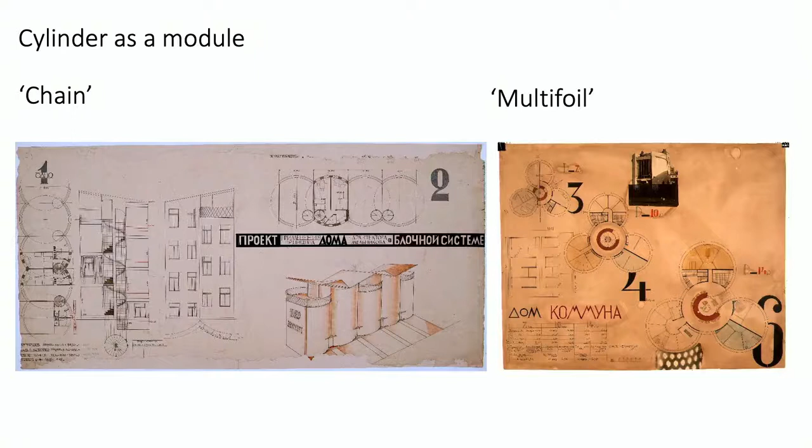Of course, Melnikov didn't invent cylinders, but the idea wasn't about cylinders themselves, rather about their interaction, their interplay. Viewed from above, the two cylinders intersect for about 1/3 of their volume, like two wedding rings. You can use any number of these cylinders as modules. Here are examples of sketch projects by Melnikov, chains made of cylinders, 5 cylinders, multifoil shapes, and he also proposed things like snakes.

It was presented as a prototype, a 1-to-1 model of future social housing. In 1920s Russia there was a housing crisis, many people coming from the countryside to the capital, industrialization, a shortage of housing. This was on the agenda not only in Russia but probably around Europe too — look at the Bauhaus and other countries — the problem of cheap social housing was on the agenda. And it was presented in this way.

But what we learned, first of all from the diaries of Melnikov, which we discovered and deciphered, is that this was just a camouflage, a cover. It was recommended by his connections, his patrons in the Moscow City Council, to present it in a socially and politically acceptable way at that time. In fact, it was Melnikov's dream of a family home.

Now we come to the family story. There was a family of four: Konstantin, Anna, and two kids, a boy and a girl, Mila and Vitya. Here is this nice couple, and this is Konstantin in almost a military uniform — but don't be fooled, this is his architecture uniform from the Imperial School of Architecture, where he was a student before the revolution.

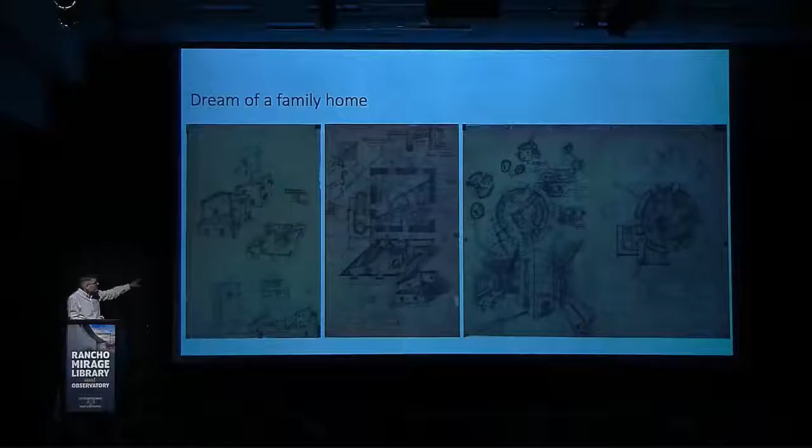So why am I so sure about his dream of a family home? We discovered these early drawings, much earlier than the house of 1927-29, from the early 20s, prototypes of his dream family home. First an almost quadrant, octagonal form, then more egg-shaped, and other quadrant versions, but unusual, with a sort of spiral, as you can see here.

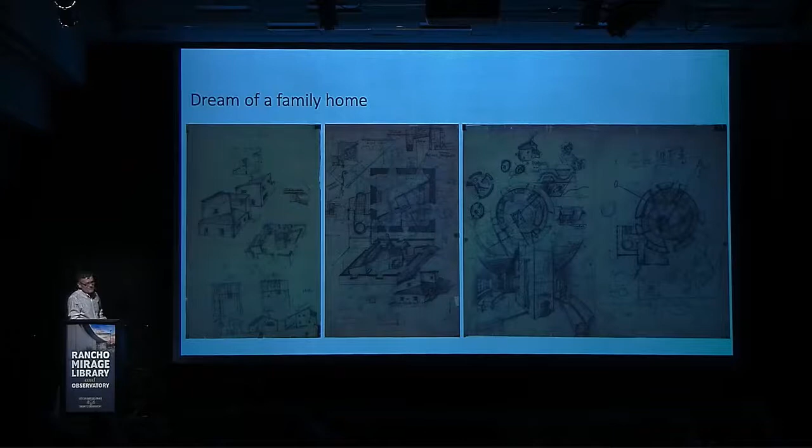But both these versions have an important deficiency. You can see in the center of the ground floor plan, here and here, the heater, important in the Russian climate. If it is right in the center of the ground floor, you become dependent on it. Life around the heater is not really a free plan. We will see how he overcame this situation in his plan for the house later.

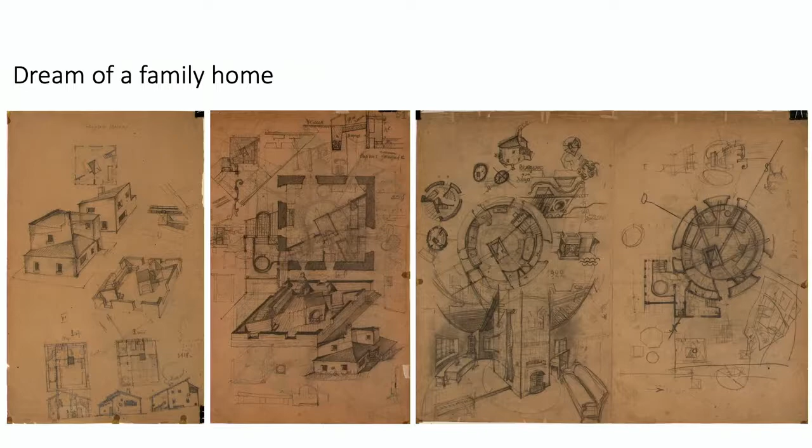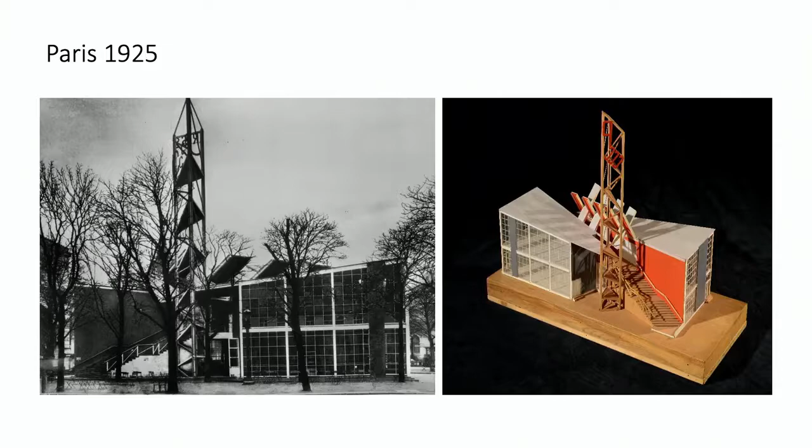I should touch briefly on two stories from a couple of years before the story of the house on Krivoarbatsky. The first is Melnikov's involvement in designing the Paris pavilion.

The Soviet exhibition pavilion for the Universal Exposition in Paris was a very low budget structure, almost a kiosk made of wood and glass, built in a really short period of time. Melnikov learned here how to deal with simple materials and how to achieve a lot in terms of architecture and space using very simple, low budget building materials. This pavilion was actually one of the sensations of the exposition.

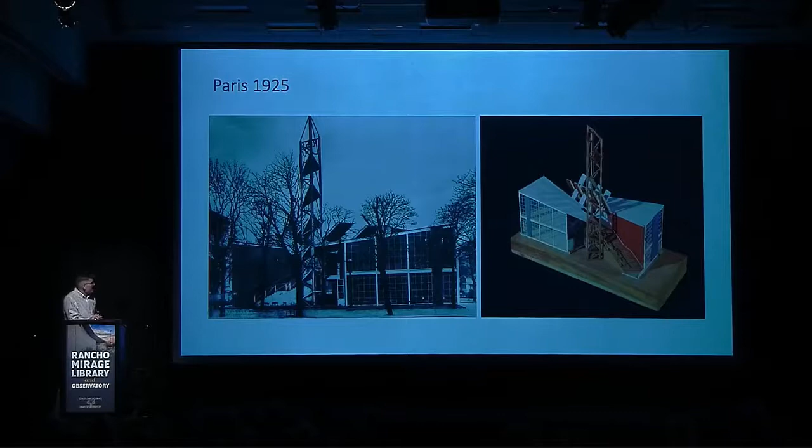Melnikov spent almost a year there. Here he is in this top hat, which is still in the house. It was too bourgeois to wear in the Soviet Union, so it's in perfect shape until now. You can see him in the circle, supervising the assembling of the pavilion by a team of French carpenters. It was an important year for him.

He became famous, as I said, and made good connections with other architects - with Corbusier, with Auguste Perret, with Robert Mallet-Stevens. But we think the idea of this house came to his mind in Paris, the idea of a house as more than just a family home - a house as a manifest, a house as a statement, a message to the city, if you'd like.

Because if you're an architect starting with a capital letter A, you have to build something like this.

Another project, less known but maybe more politically important for Melnikov's survival, was his involvement in the super secret project to keep Lenin's body forever in Moscow. We still have this strange ziggurat on Red Square, keeping the body under a glass cover, under a vitrine. It was not Melnikov who designed the building itself, but he was responsible for the sarcophagus, for the glass cover.

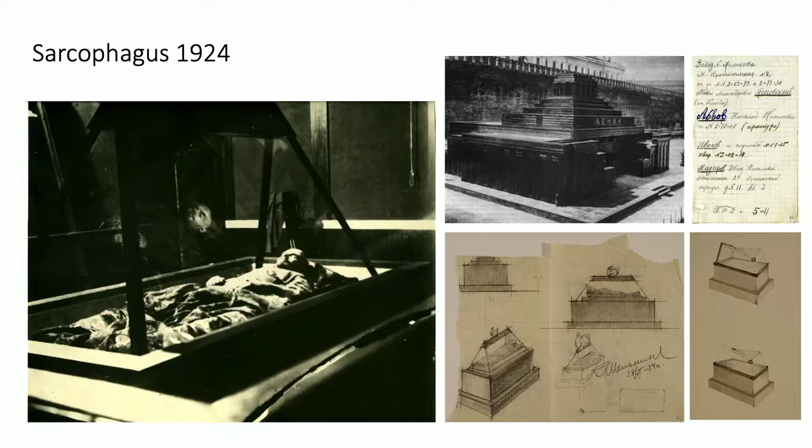It was five months' work under the close eye of special security services. It was a commission without the right to make a mistake. And he did it brilliantly.

We think, as one of our hypotheses, that the land - a small piece of land, but right in downtown Moscow, about one-fifth of an acre - was given to him as a sort of compensation for his services, for his two important jobs for the Soviet government. So he had good patrons, good protection at the top of the Bolshevik elite.

These people, they all disappeared 10, 20 years later during the Stalin purges. They were intellectuals, very naive people, idealists trying to build a utopia. But these people helped Melnikov get the land for this experiment.

So the whole story of the family home was presented as an experiment on his family - an ongoing experiment, years and years, decades and decades. So de facto, it was not private at that time. It was given for the experiment.

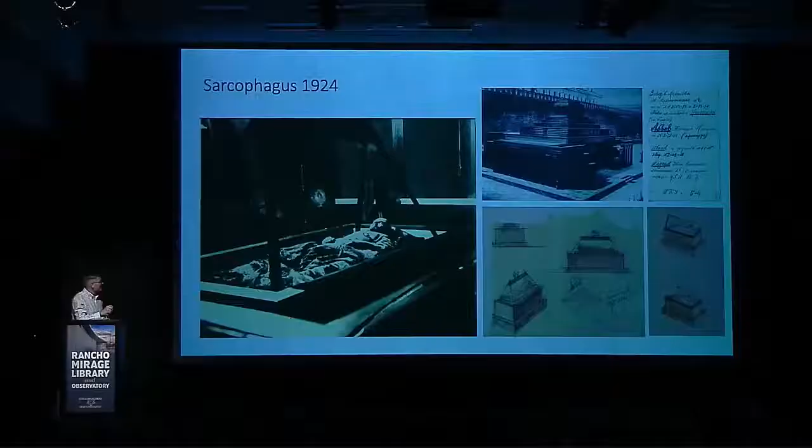But for Wright, it was definitely for business reasons, because there was a presentation room, he accepted clients there, etc. For Melnikov, his main client was the Soviet state and Soviet trade unions under control of the state, so there was no need to promote business in this way. It's definitely not a business reason. In his life, Melnikov was a very modest person. He was never arrogant, so it's not a sign of arrogance or supremacy. No way, even though it can be understood in different ways.

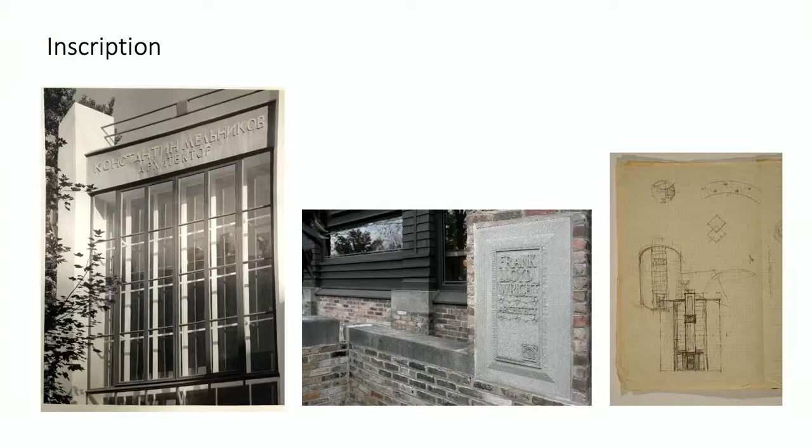Let's read again: it's not the name of Lenin or Stalin, it's the name of Melnikov. So he didn't understand the reality around him. 10 years later, he was out of the profession - basically it was forbidden for him to work as an architect, and he became like an exile in this house.

So it was a dream. He reached his dream. There were a lot of difficulties - we will talk about him later - but he reached it. He paid for this. He paid with money, but also he paid with his career and with his life.

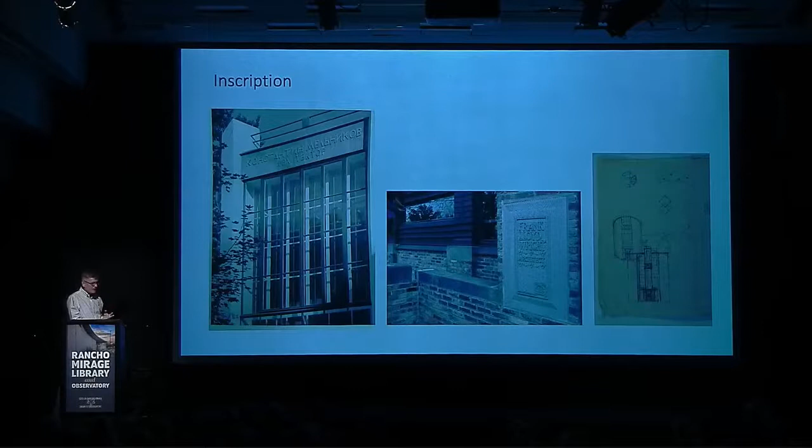So he was never sent to Gulag or to prison, no - it was a place of his exile. Nobody took over this house. But then there were like 3 decades, from '38 till the mid-60s, of surviving. At the age of 48, from being one of the top 10 Soviet architects, he became zero, nothing.

And it was really a difficult time, years and decades. And again, this house became like a curse for him.

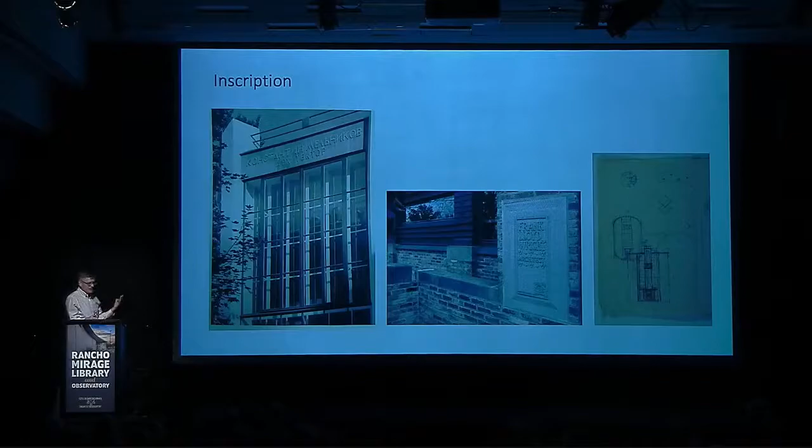You may think about this house as two cylinders, as a pure form, but I'll give you a few examples of other Melnikov projects, and you may see that he was a real master of form. Form for him was the essence of architecture, not function - form first, unlike, for example, his colleagues and opponents, the constructivists of the same period in Russia. So he worked with very interesting and unusual forms for that time, like a triangle for an office building, or a cigar shape, or a triangle and fan shape, this flower type - a flower tower - and this anthropomorphic plan for a workers' club.

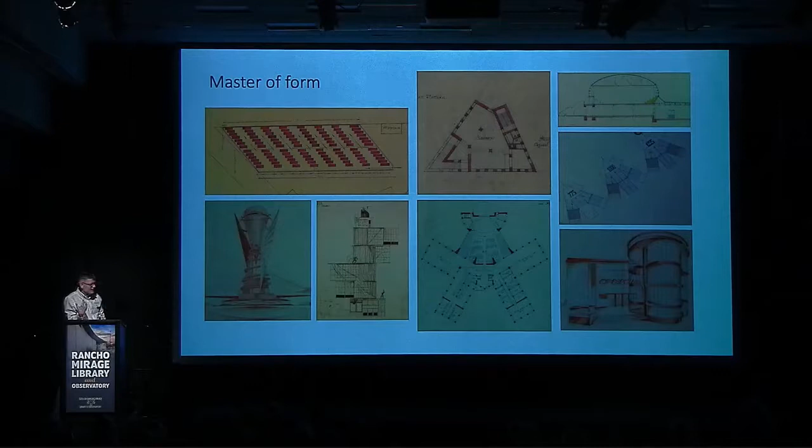To kinetic architecture - a building for a newspaper office with manually rotating floors, and his version of the Columbus Monument in Santo Domingo, rotating as well because of natural forces, wind and water, and a parallelogram for a bus garage. So for him, architecture was really an art, and he was an artist in his heart first. He was a philosopher - architecture was just an expression of his different ideas.

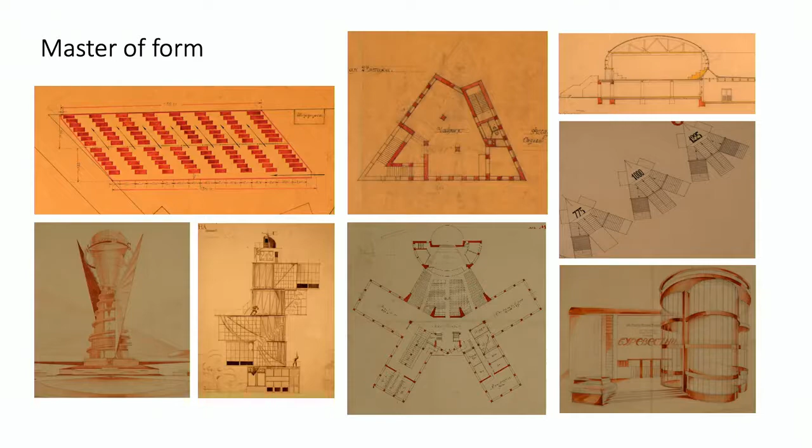Philosophical, artistic, yes. So we think about him not as an architect in a narrow sense, but a much broader story. You can imagine these two towers, these two cylinders, anywhere as a form - in the desert, on the coast, in the forest. It's a pure generic form.

But on the other side, he had a very strict, particular task: to put it on a particular plot of land, which is rather deep from the street, narrow, in between other buildings. So he was trying to move these cylinders from the street to find a proper, optimal location in terms of light, in terms of sunlight, but also in terms of views. Views for him were very important.

What was Moscow at that time? Moscow was a big city, but a big provincial city. It became capital only recently, because 200 years before that, it was St. Petersburg - after Peter the Great, that was really the capital of Russia. Only recently did the Bolsheviks move it to Moscow. So it was still a big provincial city, with the main urban dominants being churches. It was a city of churches.

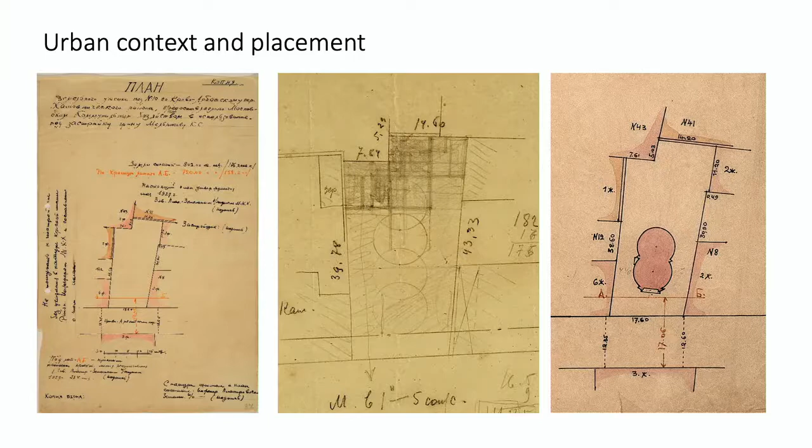For this house, an important thing is that it had three... this is the back facade with the famous hexagon at that time, and from this tower you have a view basically to three churches to the north.

This church is still there, near the residence of the US ambassador, and Savior on Sands, a famous Russian church. This church to the west was demolished a few years later by Stalin. And last but not least, to the east, this bell tower, it's in the Kremlin - so it was a view to the Kremlin, not to the walls, but to the bell tower.

So three nice views, three important views for Melnikov. As I told you, he was an old school guy, and he was a real believer. His sincere faith, sincere belief - this is the thing which helped him to survive, spiritually, to keep his individuality during these hard decades of his life.

That's what we know from his diaries. So these three views were more than just urban dominants, more than just nice views. It's something inspiring for him.

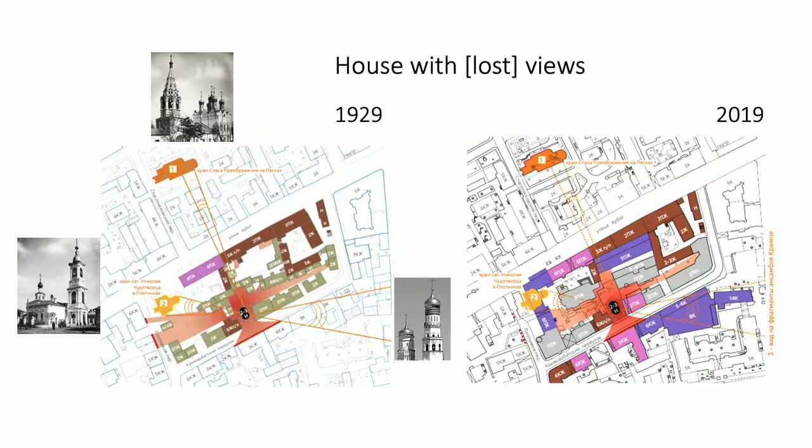If you compare it with the nowadays situation - and that's an analysis we did - with these dark blue buildings, it's all blocked now. All views disappeared. So it's a very big issue for future nomination for inscription to the UNESCO World Heritage List, because basically we have a conservation project for the house, for the garden, but the views - something really important for Melnikov - are really lost, and it's almost impossible to believe that we can bring them back.

So when you come into the ground floor... 5 years ago I was there for the first time. I saw thousands of pictures before I studied the house, years and years through books, but believe me, it was one of the biggest disappointments in my life, because when you enter there...

Looking outside at this minimalist form, you intuitively expect inside something Bauhaus type, minimalist, modernist, anyway. But what you see is very traditional, mostly pre-revolutionary furniture, petit bourgeois, yes. And yeah, this is part of a story, part of a truth. One leg of Melnikov was in the previous epoch; the other leg probably never fit in the 20th century. So he was a man of contradiction, and this house a house of controversies.

In an important place in the house, in the corner, you can see a cupboard and a case for icons - religious icons from his wedding ceremony in the church - so it was really, really important. You can say what you want about it, but believe me, in the 20s, to put icons in a visible place in your house was a big gesture, a big step.

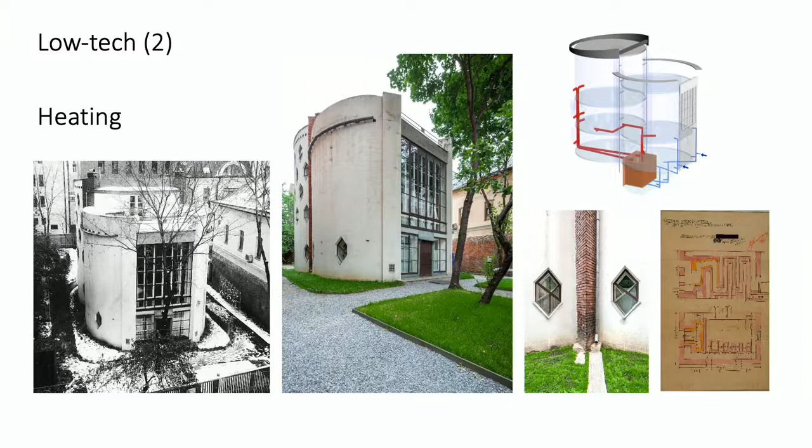In any situation. But another example, maybe more interesting, is the heating system in this house, which was probably invented in ancient Rome but used here in a very smart and interesting way. You can see two pylons on the street facade - they make a frame for the glass picture of the facade, but in fact these are columns of recirculation. So how does it work?

You see the grills, two of them, on the right and on the left. In the winter season, cold air goes from the street - as it's called, physics - it goes down to the basement. In the basement there is a special heater, a calorifier, designed originally by Melnikov. There the air is prepared, heated, and through the system of air ducts - vertical, horizontal, there are a few of them...

Again it's physics, convection - it goes up to the first level, second, third level, to the studio. Basically there is the effect of a tower, so hot air goes up, then it gets a little cooler and comes back through the main staircase, which serves like a back channel for this air. But also on the back of these pylons, in the rooms, there are grills, so it goes there for a second circle, then to the heater, third circle, fourth circle.

So my point is it's a rather energy-saving house. Results of last year's survey show more or less 20 to 80 - what I mean is it's always 20% fresh air coming in and 80% recirculated air. It's a rather interesting and well-functioning system, and I should say self-sustainable, so you don't need to intervene a lot.

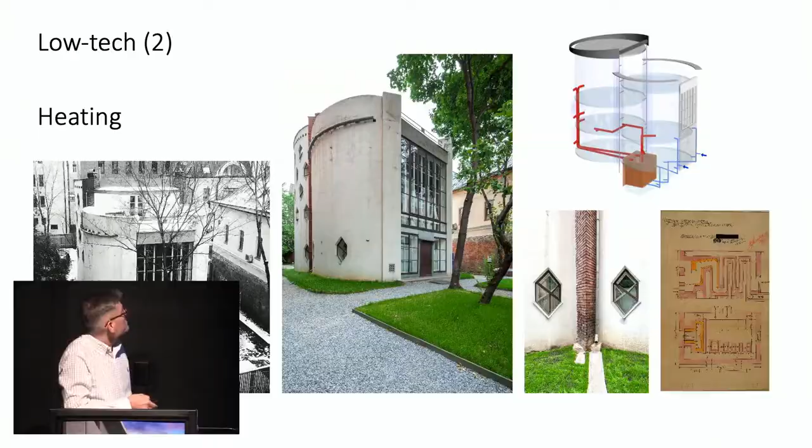So these are two examples of the low-tech side of this house. And this is the street model we have in the garden, and you can see that the composition of the house is rather hierarchical - a rather low ground floor, very much divided into small spaces. This is where, let's say, everyday life goes on.

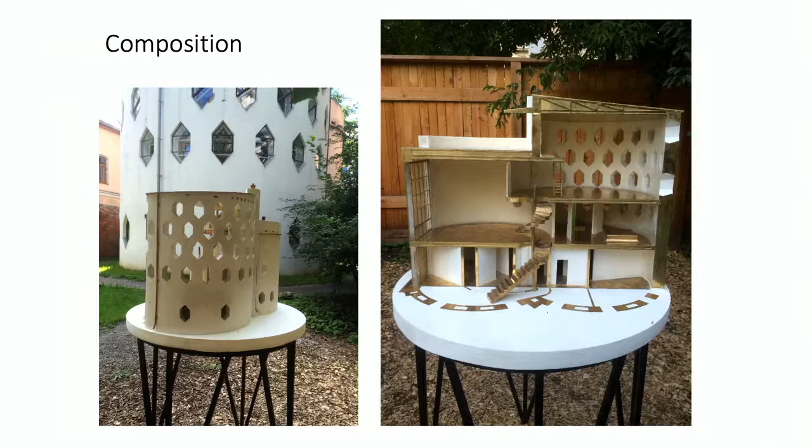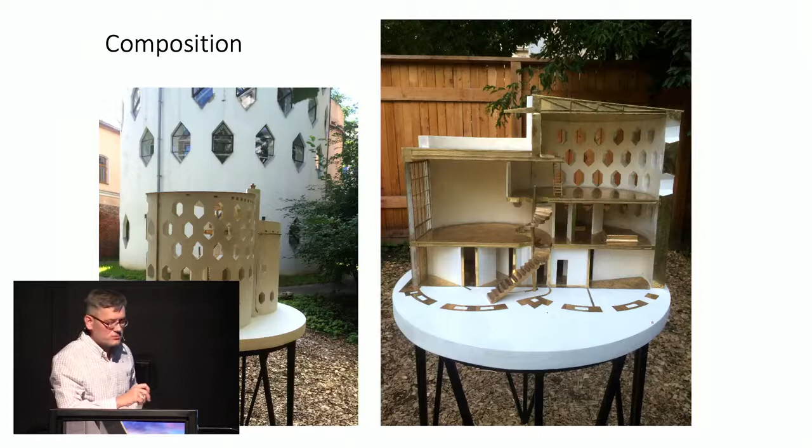Dining room, kitchen, kids' rooms, what else? Storage, toilet, bath. These two big rooms, studio and salon, are similar in size, and Melnikov made a very quick decision about them—like a puzzle, installed into each other.

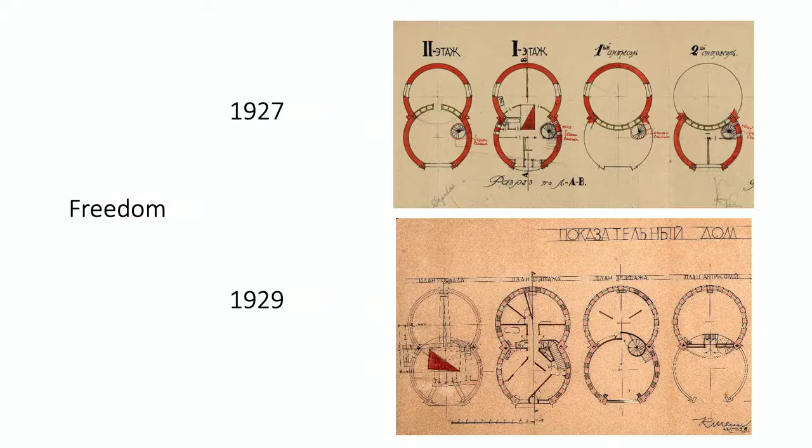But he did a lot of work on the ground floor, trying to reach maximum transparency. If we compare the start of the story in '27 with what we have now after '29, you see many changes made during these two years of construction. I should mention the word freedom, because nobody was controlling Melnikov. He applied with this page of drawings to city authorities, they approved it, and that's it.

He sponsored and financed this construction from his own savings. Nobody was behind him. He was, I should say, 4-in-1: an architect, an investor, a future inhabitant, and an engineer, because he was trying to cut costs, to save money not only on materials but also on qualified specialists. So he became an engineer. He was a good student in architecture school, so he had some engineering skills.

He changed a lot during these years. As you see in this version 27, there's no basement, and the heater is, like in these earlier sketches we saw, on the ground floor—you're very much dependent on it, like in a very traditional Russian house, running around this heater. Not really an optimal plan. And here you can see a sort of penthouse with two rooms for kids.

Later he gave them these two small rooms with blue and yellow triangles you saw in the movie—Harry Potter type rooms—and arranged a terrace instead. Last but not least, there was no idea yet of these famous hexagonal windows. You can see through all three levels there are two vitrage, two vertical windows, on the west and on the east. So he changed a lot during these two years.

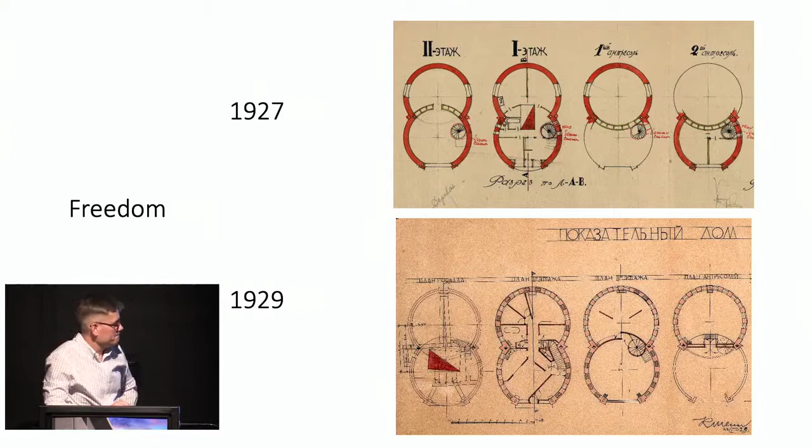Then they actually found underground structures, so he immediately installed them into his project. He managed to hide the heater, because at the beginning he had no money to dig, to excavate, to build an underground floor. So he used them.

It's just an example, but he did a lot—different issues with the depth of the foundation, and so on. So he was changing the project. Well, it was like playing piano. You know, it was like jazz in a sense.

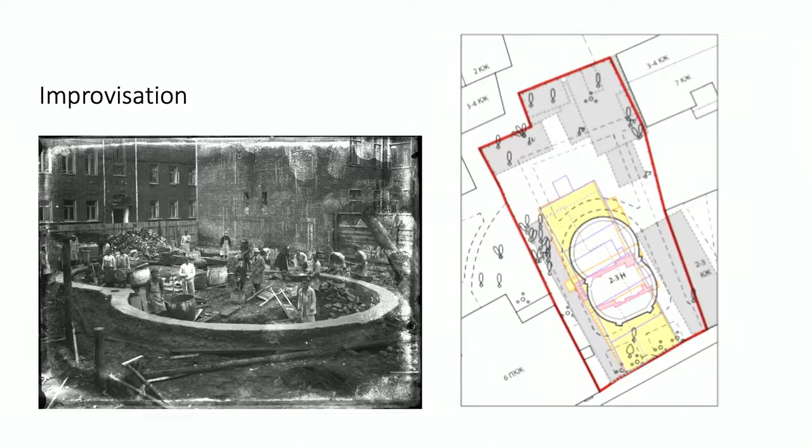Meanwhile, they met once—I mean Wright and Melnikov—in 1933 at the Triennale di Milano, where there was an exhibition of 12 maestros, 12 key architects of the time: Wright, Corbusier, Gropius, Adolf Loos, many others, and the one from the Soviet Union, Melnikov.

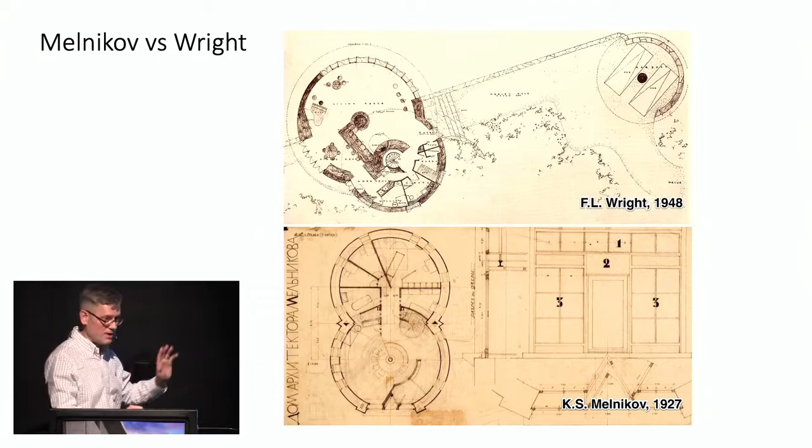But they met, though not in person. At the last minute, Soviet authorities didn't allow Melnikov to go in person, so only the exposition was there, and the house was presented. I'm completely sure that Mr. Wright saw it.

At that time, from a previous commission, Melnikov had in his pocket like 10,000 rubles, and the initial budget estimate was almost 2 times more. So, well, no wonder that sooner or later he ran out of money. The construction site was frozen, literally frozen, I mean, because it was winter.

And I think Muscovites, inhabitants of Moscow, locals, they were wondering what is going on here, because it was really unusual. But then he had no access to credit, to cheap credit. So for 2 years he tried to work with authorities to access money.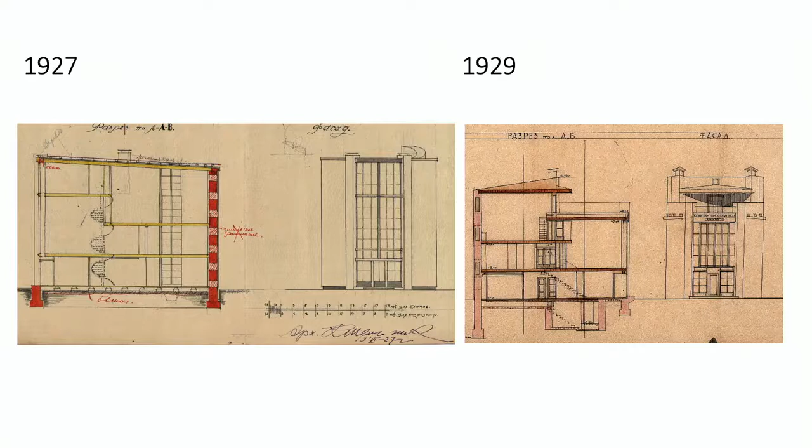Yes, with no basement. Here is a basement, and here is a penthouse for kids, and here no penthouse. So this is the same idea.

With these hexagons - the idea of this hexagonal aperture was in his mind from the very beginning, but it was not the idea of windows. Remember, it had to be a white tower with 2 vertical stripes on both sides. It was just an idea to save money, to save bricks.

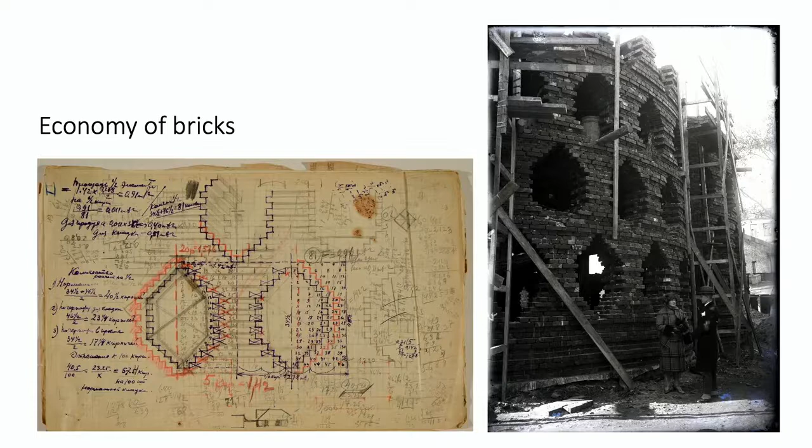So this is Melnikov's calculations. This is the proportion that instead of 100 bricks, you use 57.5, so almost 2 times less, reaching the same structural effect, the same stability, because weight is leaking around 1 aperture, 2 apertures, 3 apertures, and this round shape allows the weight to be distributed very equally. So he saved, I guess, more or less 10% of his budget estimate with this trick. For him, it was purely an economic idea behind it, purely an idea to cut costs.

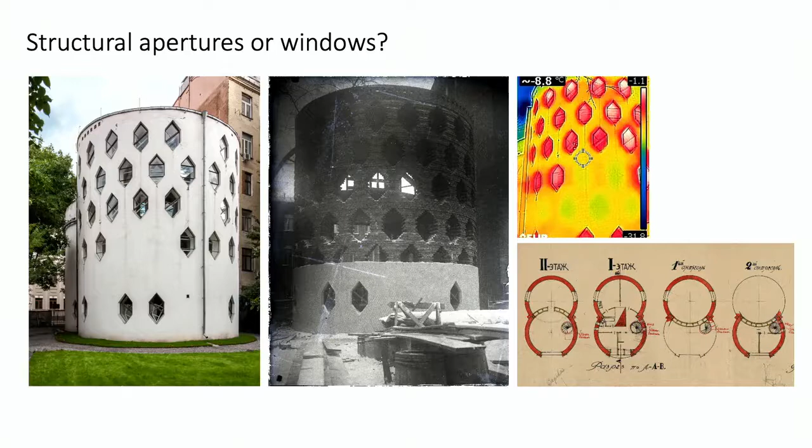Look at the facade and look at this structure during construction works. And this is a thermal image done during winter. You may see these invisible apertures, locked.

So not all of them are used as windows - more or less half used as windows, others are locked, and the color is different. This scale on the right - the more green and more blue, the better it keeps heat. This red means glass, and most leakages of heat are here. Actually that means these locked apertures keep heat better than the bricks around them.

Why so? Very simple - we checked, well, not we, our specialists checked what is inside, and it's a very sandy material, like a sandglass. It's a material with a lot of air in between particles, and air is the best insulator. So basically it's a mix of sand, clay, some rubbish from the construction site. These materials cost almost zero comparing with bricks, and it serves very well as insulation. So this was the idea behind it.

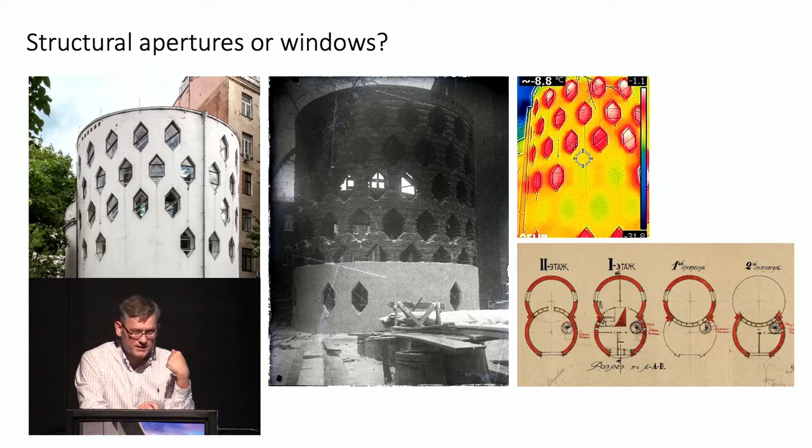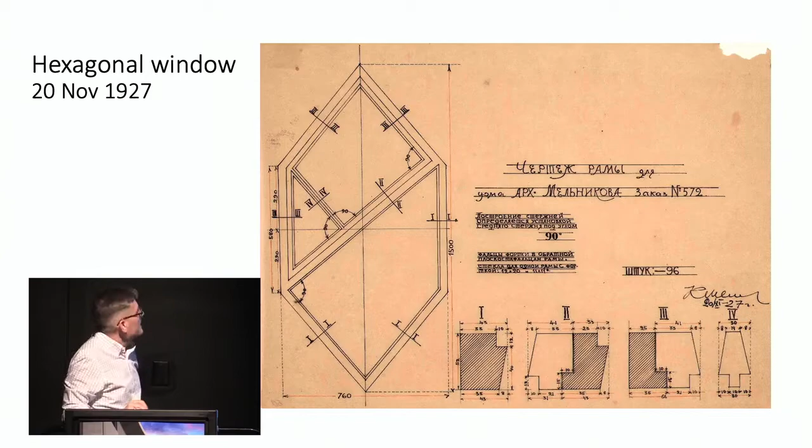So this was one of his ideas - already in November '27, the idea of these hexagonal windows came to his mind. And this is what is in between floors: intermediate floors are these simple wooden membranes, about 1 inch thick, 8 inches high, with a small step, a sort of pancake. It's like 9 meters, 30 feet in diameter, with no supports, no beams. It's a sort of magic, but it's a very reliable and very cheap structure.

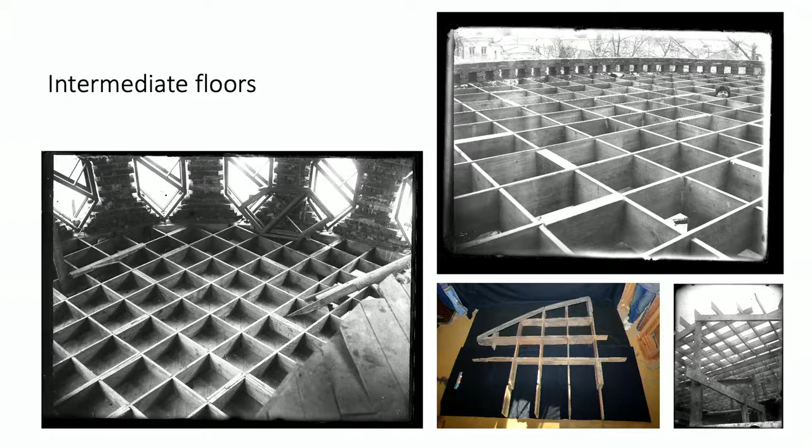Cheap, not inexpensive - again, economic factors were really important behind his ideas. This is an example from the '50s, showing that you really have a free plan, because only the outer walls, these rings, matter structurally. Basically, inside, all these wall screens don't structurally matter - you can take them away easily.

So when his son got married and there was a family of 4 with two kids, Melnikov redesigned the ground floor, took away a couple of walls and erected another wall. So it really was easy for him to adapt the house to the needs of the family. And also the idea of living windows.

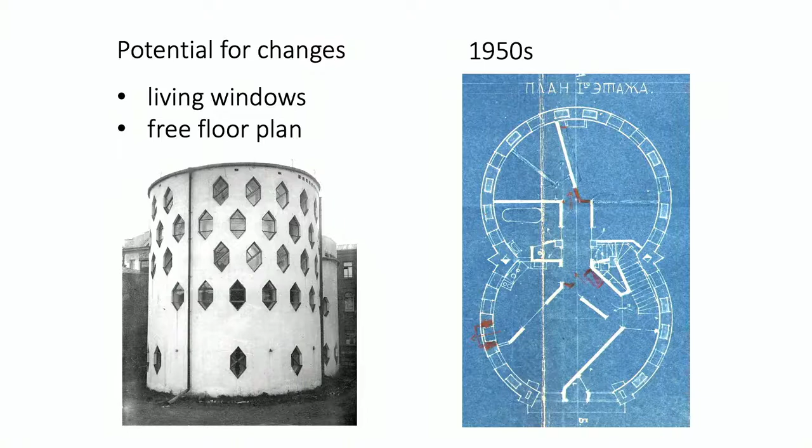If you don't need it in future, you can easily lock this window, and you can unlock this invisible aperture and use it as a window, because structurally it doesn't matter. I found it a very important feature of this house, that it has potential for changes.

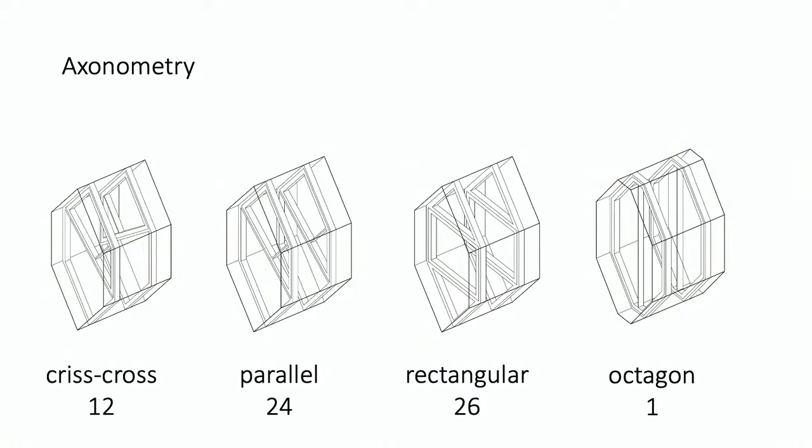So these are the different types of windows we have, and you can see that the outer walls are really thick—it's like 70 centimeters, that means 2.5 feet of thickness. So you feel inside a little bit like in a church, like in a tower, but at the same time there is the effect of a pavilion—the effect of light, again, controversial, right?

And from here in the living room, staying back to the main window, you can see the idea of Melnikov of cylinders talking to each other in architectural language. So you can see one cylinder, second cylinder, the third cylinder.

Yes, it's really, really important for him. So I mean, the cylinders matter not only outside for this form, but they play with each other inside as well. That's what I mean. And speaking about this big window, you can see that it is opened except the lower level of quadrants of glass. In this case, you have the effect of full integration in and out, and you are like on a grand terrace, like in a grand loggia, in a sense.

But meanwhile, that space—if you look at this big window, it has many references, not only because of the carpet, but also because of this big glass window, to the previous epoch, to the epoch of Art Nouveau, to what we call in Russia Russian Modern, Jugendstil, all this type of art movement. Really, this room has a lot of references to the previous epoch.

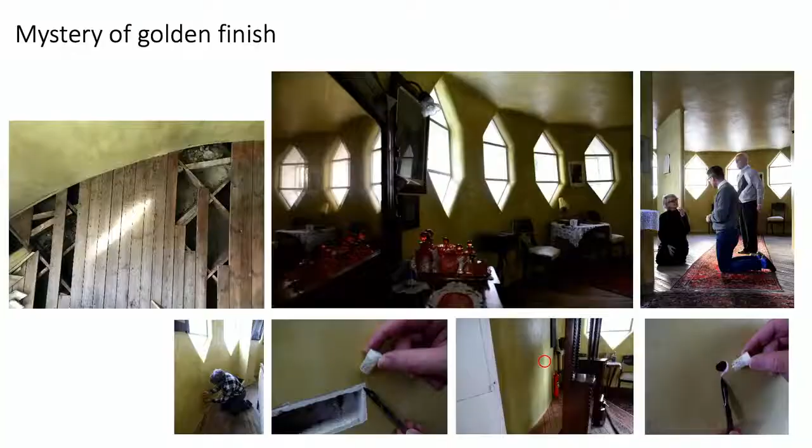But still, for us, it's a big mystery - not only about structures and feelings, but also about colors. Because what you see now on the surface is not really a successful attempt by conservators in the 90s to partially reproduce the colors. And as you may see, there is nothing on the floor, so we are wondering what was on the floor, because it's the same color, but not necessarily the same material.

So we are on the top of the house, in the studio. On the ground floor are kids, wife, somewhere Soviet authorities. Second level is the laboratory for sleep, and the salon. And the top of the top in this house is the studio - the idea of supremacy of the architect over the world.

Here you can see the balcony, a sort of mezzanine, internal balcony, which is the top of the top. And a small do-it-yourself table made by Melnikov, maybe the year after they moved in. It was his preferred place, his favorite place. He would sit there using small sketchbooks for writing and sketching, enjoying the view to the church, really to be inspired. Down there were big tables for drawings, but this was really an inspirational place for him.

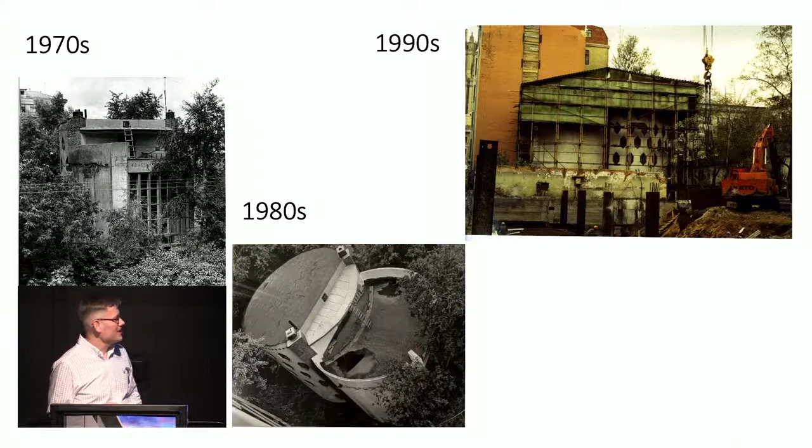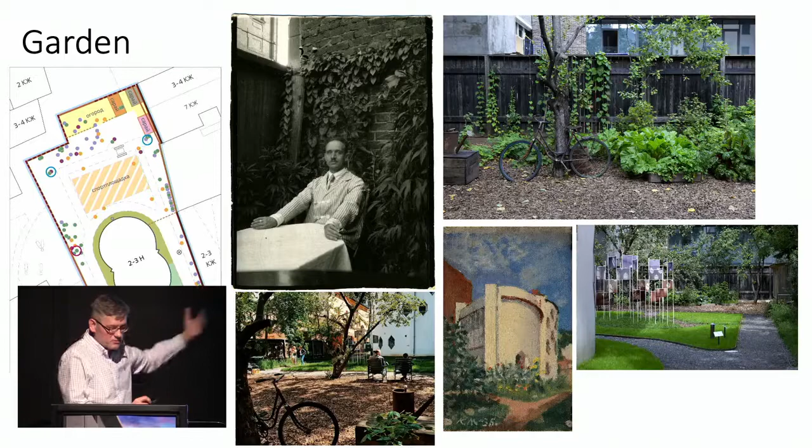Well, what should I say - the garden is also important, and we are trying to reconstruct it according to the photographs. You can see the Ipomoea, the Morning Glory, behind Melnikov. We are trying to reconstruct the vegetable garden which was at the backyard, and important sources are also the paintings from there. So it's like an open part of the museum - it's not easy to visit the house without advance reservation, but you can visit the garden and be really close to it, free, every day.

So I really invite you to experience this place, this site. It's really magical and mysterious, full of energy, full of memories. I hope we will save it, and sooner or later it will be on the UNESCO World Heritage List, and it will be saved for humanity. Thank you.